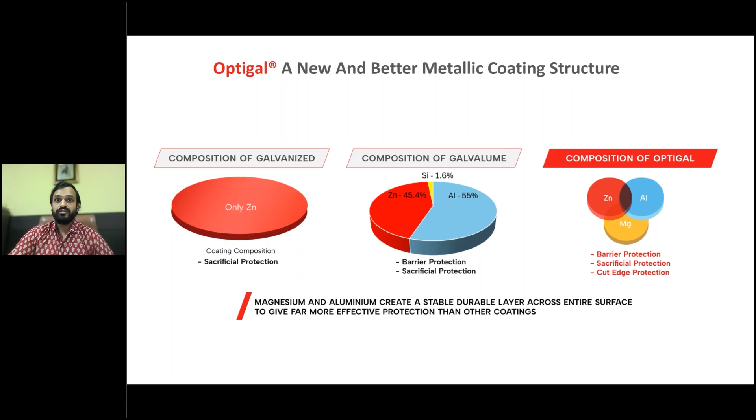Then one more thing I've really liked about this product is Optigal. They're able to give a variety of products depending on your use case. So say, for instance, you only need to make a garage system, or a house, or something you don't envisage being used for 15, 20, 25 years, they've got a Core and a Pure sheet that has a warranty of 7 to 10 years.

And for heavier use cases, for industrial buildings, for warehouses, for regions close to the coast, they have Optigal Prime and Optigal Pinnacle. Optigal Pinnacle comes with a 15 to 25 year warranty, which is again best in class in terms of what roof sheets are giving these days.

And lastly, from an application and performance basis, the variety they have in their use case is astounding. You can use it for cladding, roof profiles, sandwich panels, facade systems, whatever you so choose. So from that perspective, it is a very, very good product. And that's the reason I feel large companies like Kirby and Pennar have been adopting this product, and I see it being used more and more in the future.

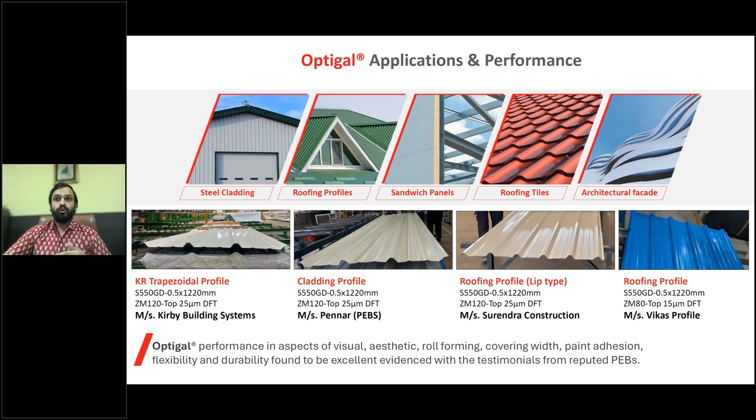So before we enter the technicals, I'd like to give a brief on who we are, what we do as a company, and who I am and what I do. My name is Siddhant Shah. I am the Deputy Director at Warerkar Associates.

As a firm, we specialize in the design of factories and warehouses. We've worked in 13 countries across 3 continents, and we've completed close to 2,000 greenfield factories and warehouses, expansions notwithstanding, and have designed close to 22 million square feet. For us, I often like to say that you cannot survive a day in India without using a product that's come out of a factory that we have made.

So our expanse in the industry is so much that whether it's the toothbrush you use, the food you eat, the flight you take, or the car or vehicle you're using to travel, no matter what, you can't survive a day in India without using a product that's come out of a factory that we have designed.

Some of our major clients include PepsiCo, Britannia, Supreme Industries, Relaxo, ITC, Dixon, among a bunch of clients. We've had the pleasure of doing 2,000 greenfield projects with an 80 to 82% client retention rate. We've worked with some of the best and biggest companies in the country as well as abroad. As a firm, we've worked across 13 countries and 3 continents. We've just broken ground in South Africa, which is our 13th country.

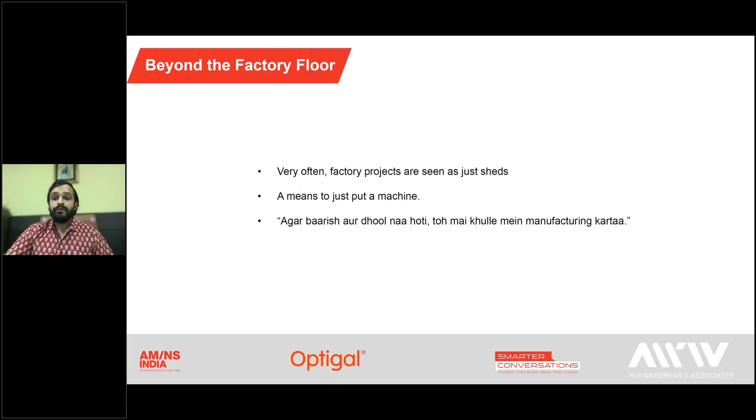Furthermore, I feel we now live in a time where designing the factory and warehouse is part of the machine. Additionally, we have a lot of pressure to always keep working against the clock.

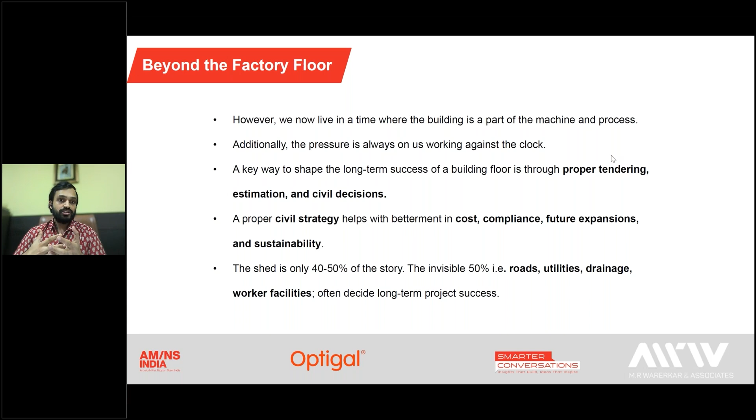Under all this pressure of working against the clock, a key way to shape the long-term success of a building floor, in my opinion, is through estimation and civil decisions. A proper civil strategy can help with cost, it can help with compliance, it can help not just with the present but the future, and it can help with using sustainable design practices.

A gripe I have as an industrial design company is that clients only think about their factory floor. There are a lot of developers on this call, and what tends to happen is when people are pitching to you, they only talk about the factory floor. They will only talk about the box and give you the cost of that box. However, that shed is only half the battle won. Roads, utilities, drainage, worker facilities - these contribute the balance 50% of the project, and they make or break the success and failure of the project.

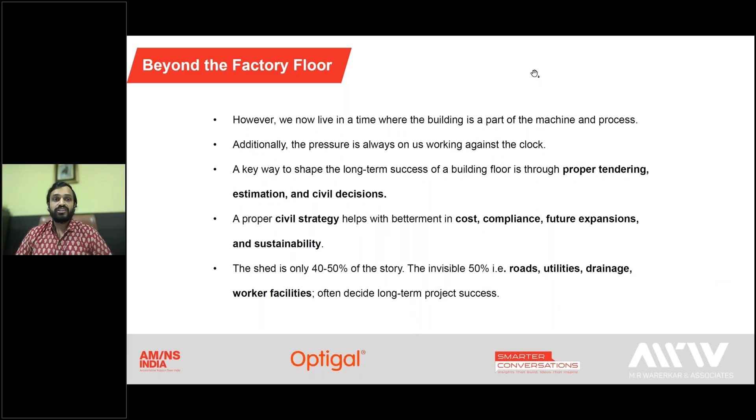As a country, India has seen unprecedented growth in both manufacturing and warehousing. As we've seen these upward trends, we've had increased spending power as a country. We've had more access to spaces owing to a better road network, rail network, and flight network. We've had schemes like PLI and Make in India. We've had increased consumer demand cause a boom in the warehousing industry. This has caused India to be projected as the third largest manufacturing hub by 2030.

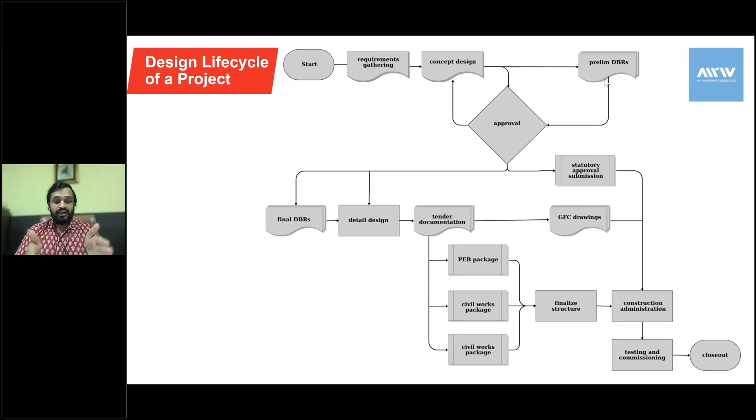Once your preliminary DBR is approved, you're simultaneously working on statutory approvals, DBRs, detailed designing, tender documentation - all these things collate at the same time. Because you're working with multiple fronts and multiple stakeholders simultaneously, things become very chaotic. If we get the first 4 stages right - the master planning, the design and approval, tendering, procurement, and land acquisition - the factory construction, operations, and expansion become a breeze.

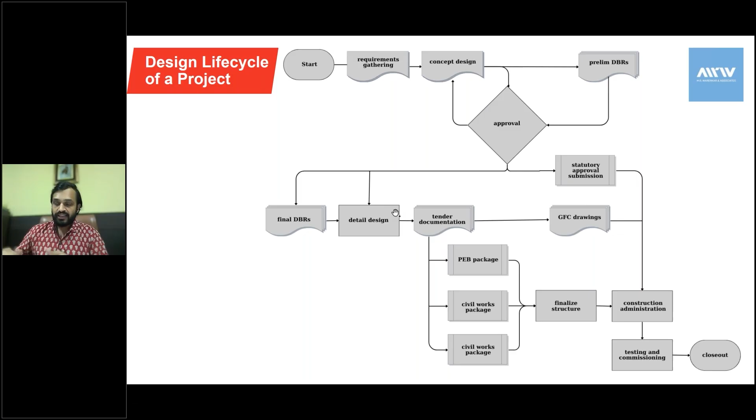And for your client, it becomes very easy to actually use their facility and then expand without having to disrupt their existing facilities. So very quickly, I thought I would like to do a quick poll, and I'd request the team to put the poll on.

So in your opinion, what is the single biggest challenge that you face during tendering? Is it cost accuracy? Is it vendor reliability? Is it scope clarity? Or is it time constraints?

I'd request the team to display the results. I think that's a minute or so done. Do you reckon we can share the results of the poll?

I think what I can see is it's actually quite tight. 31% of people struggle with scope clarity, 29% with cost accuracy, 24% with vendor reliability, and 17% with time constraints. So it's pretty neck and neck for the first three categories, and time constraints also seem to be a major issue that people deal with.

So from MRWA's perspective, typically these are the steps that we follow for tendering, and hopefully if we follow these steps properly, the issues that we're having with cost accuracy, vendor reliability, scope clarity, as well as constraints and time can be dealt with effectively.

So we start with vendor pre-qualification, wherein you pre-qualify and look at the right vendors to give the tender to. The right vendor might not always be the best vendor profile that you have received. The vendor needs to be the right size and the right fit for your organization. I'll go over this a little more in detail.

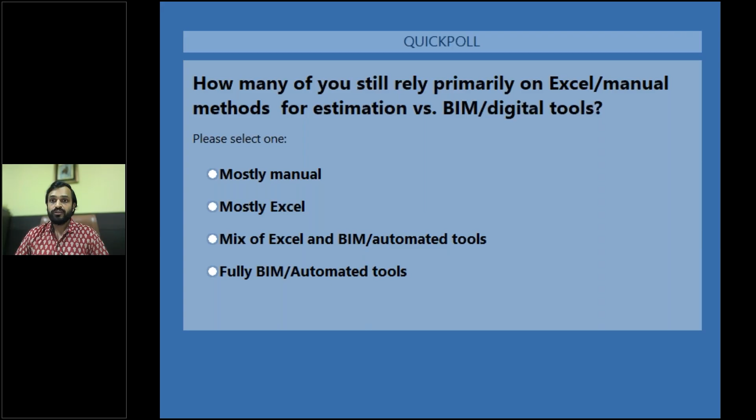Yeah, I think we can close the poll now. So what we are seeing is, I think over half the people, 51% of the audience, is using mostly Excel. Around 29% of the audience is using a mix of Excel and BIM and automated tools. 15% of the people are using hand calculations and are mostly manual. And 4% of the crowd is using completely BIM and automated tools, which is quite interesting. It's quite interesting to know that a significant portion of the people are using a combination of Excel and BIM.

So I'll now go into preliminary estimates. A preliminary estimate is an area-based estimate, which gives you the cost for all the key components as blocks. So for instance, you consider the cost of a building, the cost of roads per square meter. You consider the cost of boundary wall and external drainage per running meter, tanks in kiloliters, earth filling in cubic meters, and that sort of thing.

And these are made along with drawings to help a client make informed choices. Now, these numbers, of course, cannot be numbers that are plugged out of thin air. There has to be some logic to them. So what we try to do as architects is increase the degree of accuracy.

Firstly, you take into account the soil investigation, the land survey, the hydrogeological survey. You understand from these things, and they help us figure out what the levels of the building should be, how much cutting and filling is required, and what strength of foundation is going to be used based on the loading that we have.

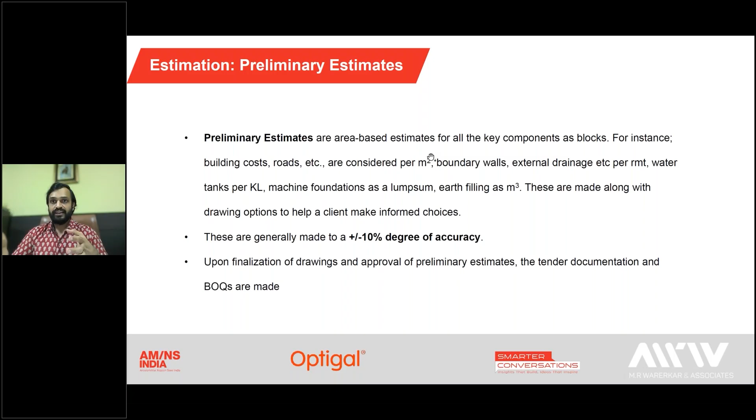Typically, we say these need to be designed to a plus-minus 10% degree of accuracy. There are a number of things that need to be considered, and it requires practice. It's not easy for someone to say, oh, why does this building cost 20,000 rupees a square meter, or 15, or 12, or 25, whatever it is. There needs to be justification for the decisions taken, by means of the methods we've used.

Once you make a preliminary estimate, say you've given your client 3 options from an architectural perspective, and you give them 3 preliminary estimates with the degree of accuracy considered, that helps the client decide: I can go for a slightly better layout if it's only costing 2% more, or if this option requires too much filling, I don't want to do that. I'll design culverts, or put pumps and sumps to get the water out in case of flooding. These things help clients make informed decisions.

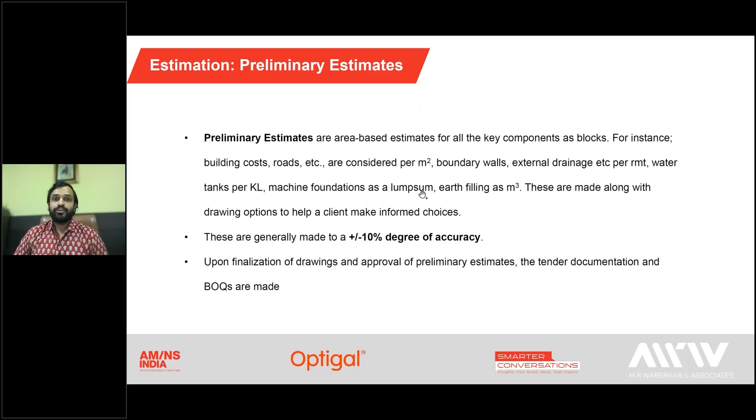These decisions then lead into us making the BOQ and the tender. Upon finalization of the preliminary estimate, we work on the BOQ and tender. So it's important to have all the key information and key assumptions made. Any detailed BOQ we make, whether on Excel, on BIM, a hybrid, or an automatic sheet on Excel, all these are a case of garbage in, garbage out. The more accurate the information we're privy to, the better the quality of the final cost.

The ideal scenario would be if the client waits for all detailed drawings to be made and only then starts tendering. If that's the case, you can make the BOQ to 100% accuracy and everybody is happy. However, more often than not, that's not the case, because we're always rushing against the clock. You have to make a lot of assumptions, and a lot of smart choices, to lend a certain degree of accuracy.

So it's important to have all these key assumptions signed off, and to have as much information as possible from day one. If the information I mentioned earlier can be received to a higher degree, then once the client has signed off on things like the column layouts, it's prudent to ask your structures team to get a preliminary structural design and drawings done, so you have a basic size of foundations, columns, beams, and other elements.

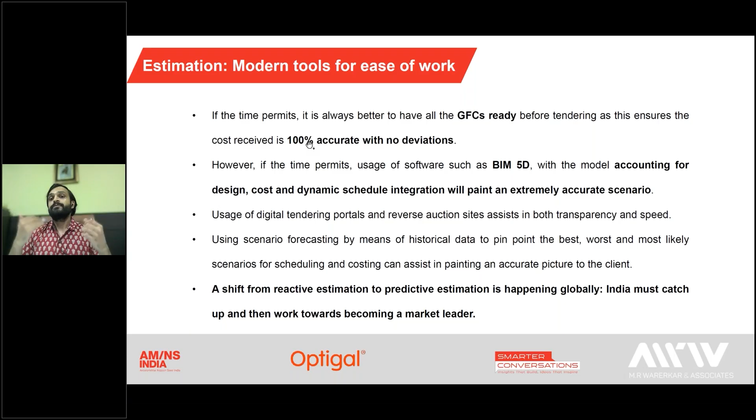It is important for us to estimate for the non-shed aspects of a factory as much as for the factory shed. Value engineering for roads, drainage, utilities, worker facility blocks can make or break project costs. Do we always need a thick RCC road, or can we get away with bituminous roads in some places? Do we always need concrete pipes, or can plastic pipes be used in certain places? These are some things that need to be considered.

Furthermore, when you account for future expansions in master planning and future-proofing the building, you ensure that when the next phase comes, the previous phase sees little to no disruption. This saves a lot of time, rework, and money.

Something we do with our clients is make a master plan for the first phase, second phase, third phase, everything that is coming up. Say the next building needs to be joined with the previous building, we account for that in the foundation itself. That side's wall is designed in a way that it can be easily removed. The same provisions are taken in the utility block, and nothing is placed where the factory needs to be designed.

These sort of decisions, as civil engineers, it is very important for us to consider from a scheduling perspective, from a design perspective, from a tendering perspective.

Lastly, ESG requirements. If you use proper waste management techniques, solar panels, low flow fixtures, paints with high solar reflectance index, proper insulation, rainwater harvesting, along with timely permissions, these help save a lot of money from an OPEX perspective by being a little more expensive from a CAPEX perspective. So over a 2 to 3 year period, your client saves money.

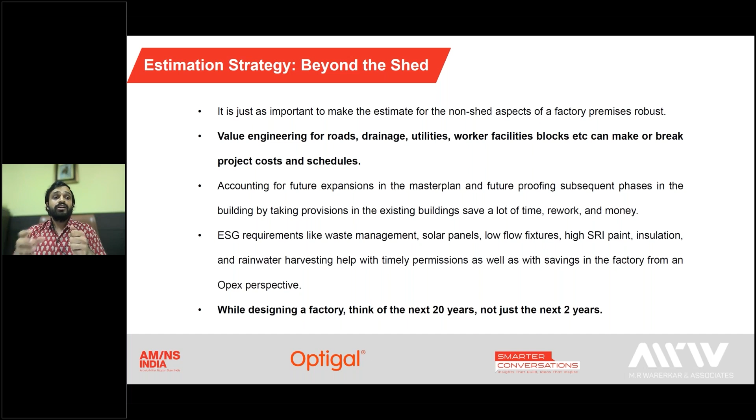Also, if you take all these ESG requirements into place from day one, it is very easy to get factory inspector approval and other approvals. So what I always tell people is when you're designing a factory, think of the next 20 years, not just the next 2 years. For us at MR Warerkar, we do end-to-end design.

We do architecture, structures, civil, plumbing in-house, and we have electrical, HVAC, firefighting consultants who we work with.

We can't recount the number of times reworks have had to be made because someone is working on revision 4 of the drawing, someone is working on revision 3, someone is working on revision 1. From a civil planning perspective, the most important thing is integration and free flow of information, and everyone being on the same page when working.

To prevent this, it is very important to make coordination drawings for all the disciplines. You either do it in 2D or in BIM. You define a clear scope. You make RACI matrices, which are responsibility, accountability, informed, and consulted. So everyone has their own role in this.

All of these things, when you have coordination drawings, when everyone is working on the same version, and everyone knows their role, it prevents a lot of rework, minimizes errors, and saves a lot of cost and time.

So now I come to the third and last poll that I have. Where, having heard all of this after the presentation, do you see the maximum potential for improvement in your project? The poll is live now.

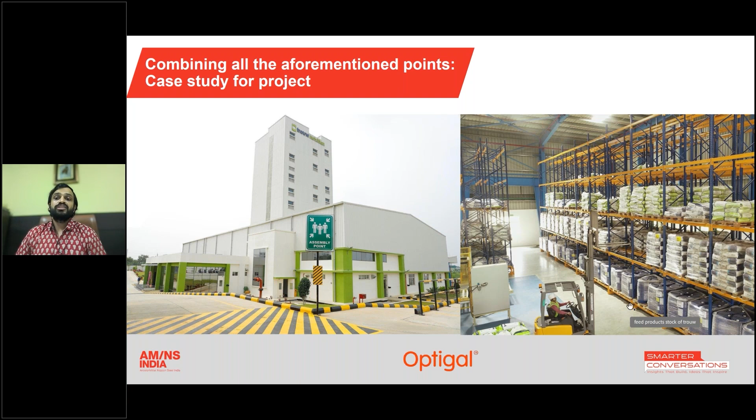Then this is a facility. As you can see, it's got quite a funky shape, with a lot of cutouts and other things. So this wasn't by design. We weren't trying to make it an architectural feature.

There was a high tension cable running close to the plot, and because of this, you couldn't construct anything 36 meters on either side. So while mapping for that distance, while also trying to maximize the amount of floor space we could cover, we ended up getting this very funky design. Not only were we able to deliver on all the requirements the client had, but they actually did end up liking the facade quite a bit.

Lastly, this is a project we did in Zimbabwe. Our head of civil engineering, Mr. Zakir, actually went to Zimbabwe. He sat with the client, went to market, and understood all the rates required as per local requirements.

After understanding the local market, he tweaked the tender and the BOQ that is made in India and customized it according to how it needs to be made in Zimbabwe. Not just that, we worked with the client on pre-qualifying the right vendors, because there were no vendors that existed in Zimbabwe. So we found vendors in Europe, vendors in China, and also for the PEB that had to be done.

We looked at three options: shipping the material from India, shipping the material from China, and shipping the material from a local plant in Africa. We pre-qualified all the vendors who could do this, looked at their cost, looked at their time commitments, and then figured out the best method and procedure to do this.